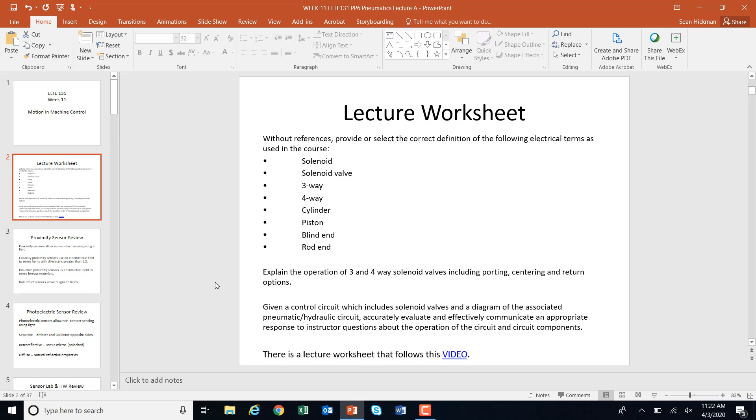Let's start with a proximity sensor review. Proximity sensors allow non-contact sensing using a field. You don't actually have to touch something, you just get within the field. Capacitive proximity sensors use an electrostatic field, and they're affected by dielectric greater than 1.2. We saw that styrofoam didn't do it, but if you had a bottle full of liquid, the liquid would set it off, and it senses just about anything. Inductive proximity sensors use an inductive field to sense ferrous metals. And then Hall effect sensors use magnetic fields.

So that was our proximity sensors. We talked about photosensors, and they used light to allow non-contact sensing. They were separate, with emitter and collector on opposite sides. Talked about a light curtain. Retroreflective uses a mirror, and we demonstrated polarized versus non-polarized. The polarized gives you even a little more specific operation if you need that. And diffuse uses the natural reflective properties of the material.

There's also a variety of other sensors we talked about, for example ultrasonic that might deal with sound. And we took a look at some homework and some labs.

I encourage you to pause the video and check the homework here. You can click this link and see how your homework compared to this. I kind of talk you through some of it. It's going to be just like this on the quiz. And the sensor lab answers can be found here. It takes a little while. I go through the sensor lab, and you can compare your answers to what was here so that you're able to pass the quiz.

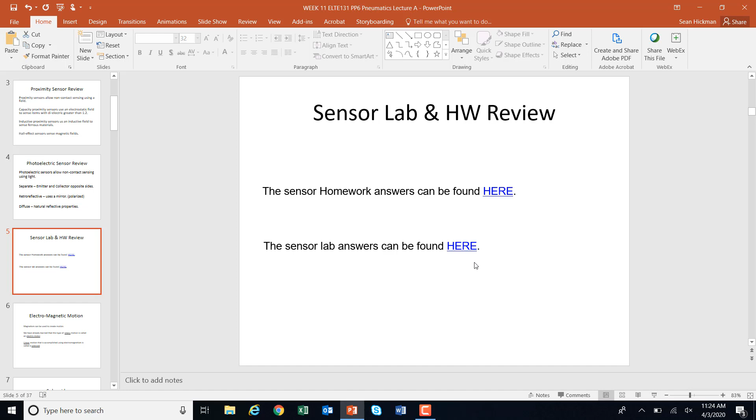So this week we're talking about motion. We're going to start talking about electromagnetic motion. We've learned that magnetism can be used to create mechanical motion. We've learned that rotary motion, when you use magnetism and electricity, is called an electric motor. We're not going to get into electric motors right now. We're talking about creating linear motion using electricity and magnetism. We accomplish this using a solenoid. So electric motor for rotary and a solenoid for linear.

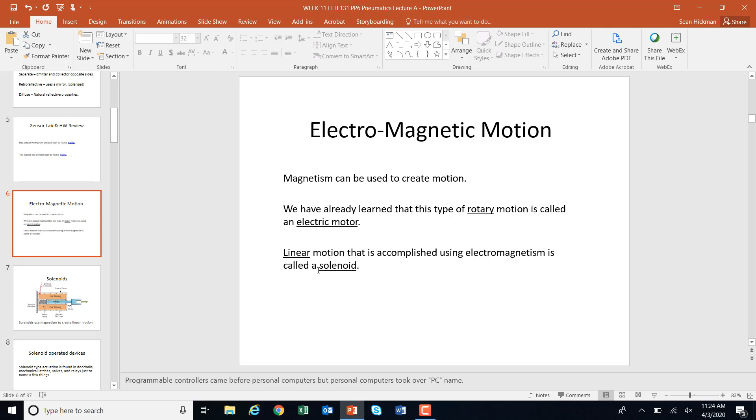What is a solenoid? They use magnetism to create linear motion. Here's a cutaway of one. Hopefully it makes sense to you. This is a coil of wire here, this winding here. It's a cross section. So when you run current through there, you get a magnetic field. And so when that magnetic field comes online, you have an iron or steel plunger here, and it gets pulled in towards the magnetic field. And then when you remove the current, the magnetic field goes away, and a spring pushes it back out. So this is linear motion, in and out, depending on whether there's a magnetic field or not.

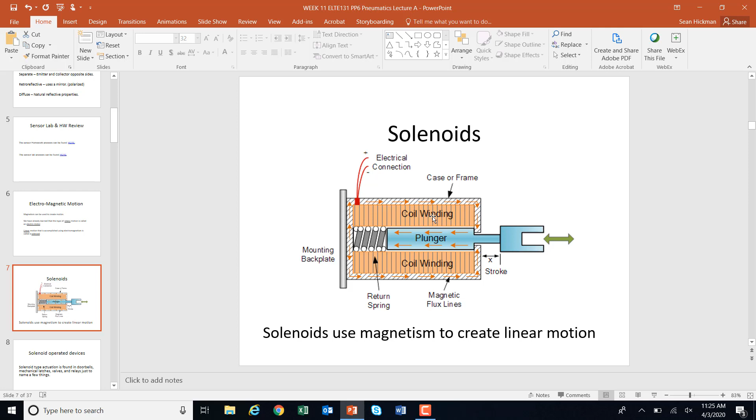Solenoid operated devices. There's quite a few around. Let's go back to your 109 days where you had the buzzer boards, those bells. Your doorbells there were solenoids that were just pulling a ringer in and out and hitting it up against a steel annunciator. There's mechanical latches that you could use a solenoid to pull in, maybe like in your car doors. Valves use solenoids. That's what we're going to be studying today. Relays use this solenoid actuated device. You run it through a coil, and it pulls the relay in, and the plunger comes in, and the contacts are make or break. So there's some solenoid devices that you might be familiar with.

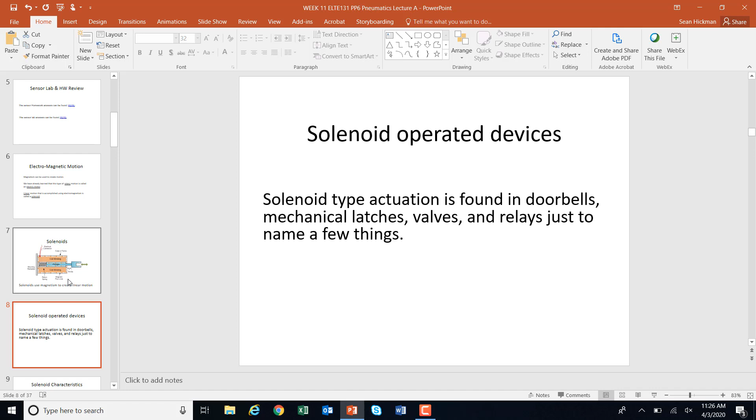Just want to remind you of the solenoid characteristics because it's a coil. When you first energize it, you're going to get a very high inrush current here. And then as the solenoid starts to move, and it moves to the position where it's supposed to be, this inrush current settles down a little bit, and then you have your steady state current. You must protect the circuit at a level that's above the steady state current. So let's say the steady state current is 12 amps. Maybe a 15 amp circuit breaker would work, okay?

But you wonder, well, this exceeded that 15 amps in this shaded area. Yes, you can do that for a very short time, and that is your time delay. So your delay has to be long enough so that you get underneath the circuit protection and then steady state, so the circuit protection doesn't trip.

So what affects this operation of a solenoid? Well, the pull - what is the solenoid pulling against? Let's say you have a solenoid that's pulling the locks on your door. Whatever that takes, is it a pound, 2 pounds, a half a pound? That amount of pull that it's pulling could cause this to spike up higher or lower, right? The stroke length - how long of a pull is that solenoid?

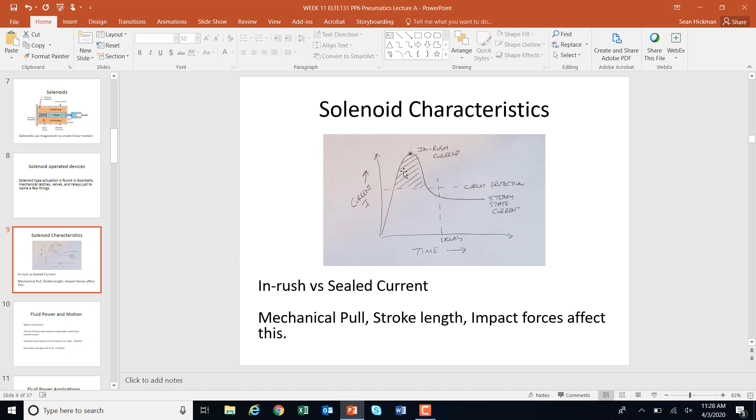The longer it is, the more this current spikes up, and the longer it takes to settle down. A very short pull, and it just might pop up and then settle in real quick. Impact forces—it's kind of a violent situation when you activate a solenoid. It slams, and does the solenoid bounce back and forth a little bit, or does it just activate? Those are some of the things that affect how much initial current it draws when you energize it.

Let's move on to fluid power and motion. What is fluid power? It's the use of fluids under pressure to control and transmit power. Hydraulics uses a liquid such as mineral oil, and pneumatics uses gas or air.

Let's take a look at hydraulic fluid power. You see this on big machinery like bulldozers and backhoes, with huge hydraulic cylinders. That hydraulics operates at a pressure of a couple thousand pounds per square inch, or PSI. The benefit is you get a lot of force out of those cylinders—a lot more. They're very high pressure, a lot of force. That's the benefit.

But the drawback is you could end up with a very loud system. That system leaks a lot, and it can catch on fire because hydraulic fluid burns.

Whereas pneumatic uses air, and we'll be using compressed air to move a cylinder, and you see a lot of this in automation. The benefits are that it's clean. If air leaks, big deal, right? Compared to hydraulic fluid, it's not combustible, and it's readily available. Most shops have an air compressor system that you can access.

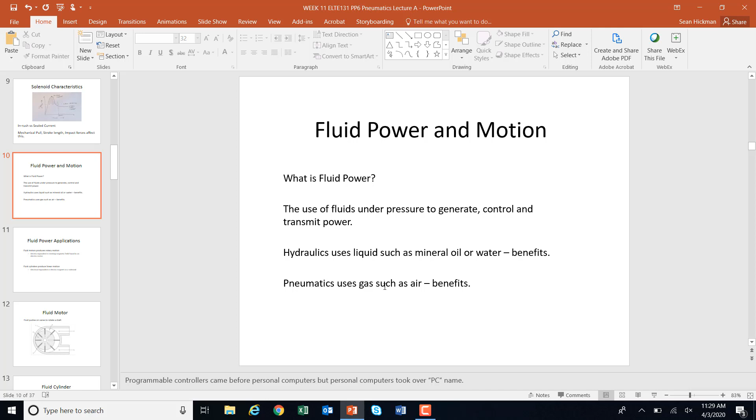The drawback is it's not nearly as powerful as hydraulics. So if you need a lot of force, you end up with pneumatic components that are quite a bit larger than the hydraulic components.

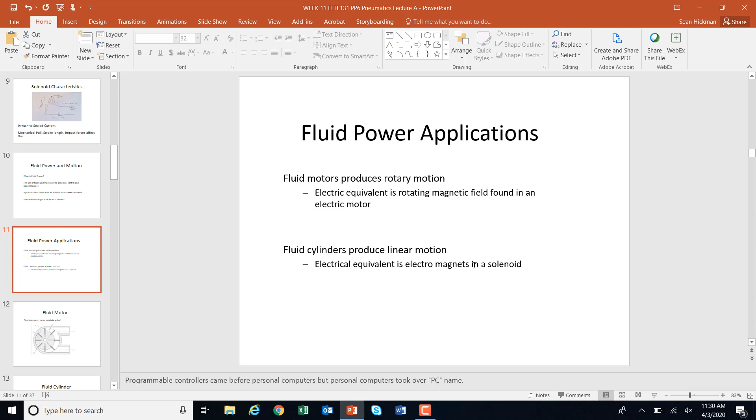So, fluid power applications. We can use motors to produce rotary motion, similar to how we use electricity to create rotary motion with an electric motor—we can have a fluid motor. And fluid cylinders can produce linear motion, similar to using a solenoid with electricity. So we can get rotary and linear motion using fluid power as well.

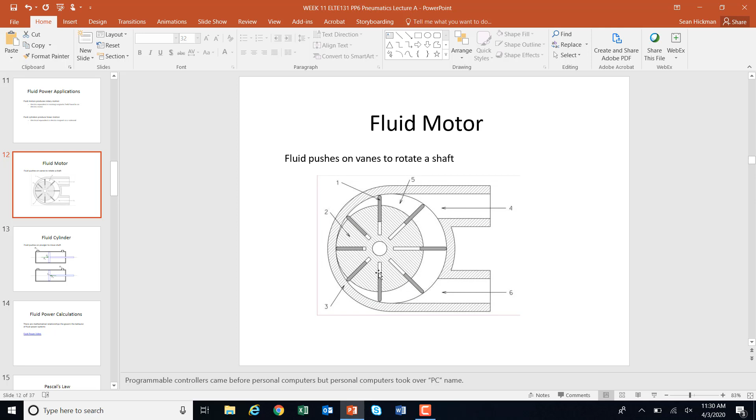What's that look like? Here's a fluid motor—this is a vane type compressor. The air comes in, it pushes on the vane, so in these pockets there's pressure, and it gets sent around and then exhausted on this side. This will spin, creating rotary motion, called an air motor or a fluid motor or hydraulic motor.

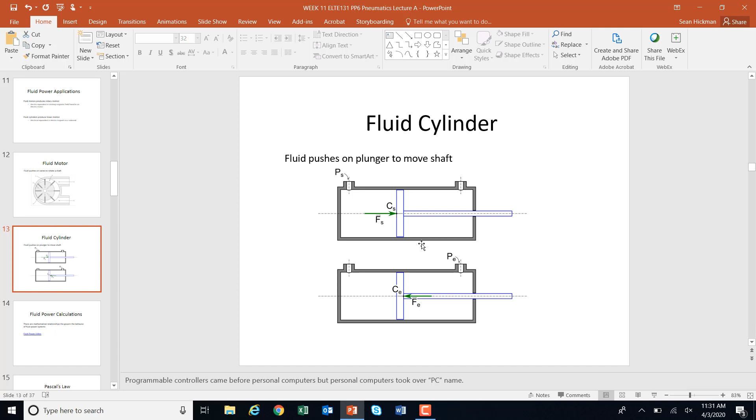What we're really studying this week is cylinders. The way a cylinder works is you have a piston inside. When you put pressure on this side, you get higher pressure on one side of the piston, and the piston moves out. When you want to retract it, you run pressure into the other side, and the piston moves this way. That's a quick summary, and hopefully you understood from the reading that we're using cylinders with pressure on either side.

There's a lot of mathematical relationships that govern the behavior of fluid power systems, and there'll be a little bit of this on the quiz. So go ahead and stop right now and watch this short video on fluid power.

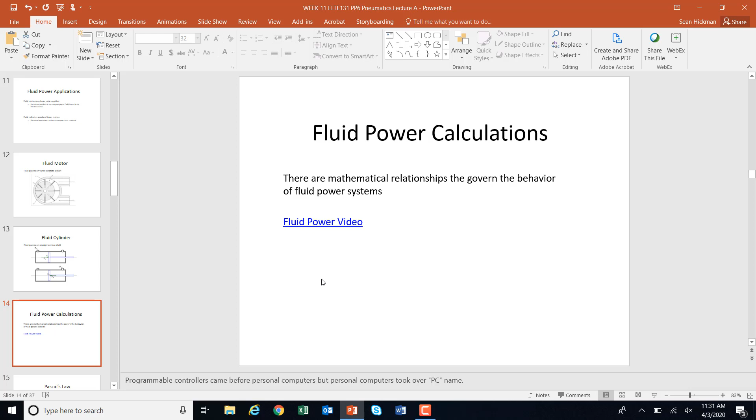So this is the pressurized fluid here, and if you pressurize something too much, it just explodes, and it explodes outward, perpendicular in every direction. So that was Pascal's law that you learned about.

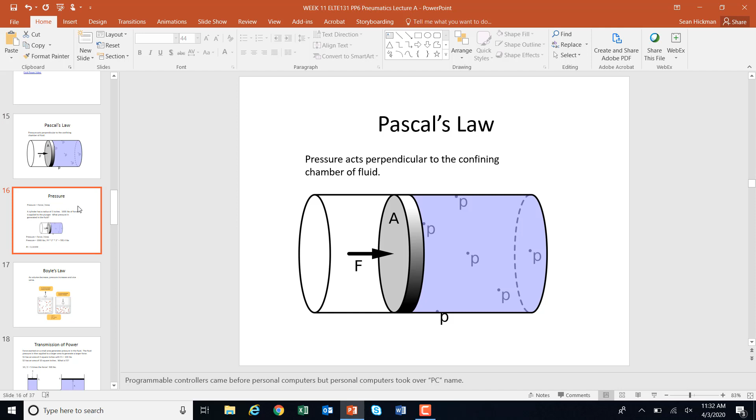The video showed that pressure is force over area. My force is 1,000 pounds, that's what I'm pushing down with right here. And area is pi r squared, so pi times radius squared, where pi is 3.14. So 1,000 divided by pi radius squared would be 785 pounds per square inch.

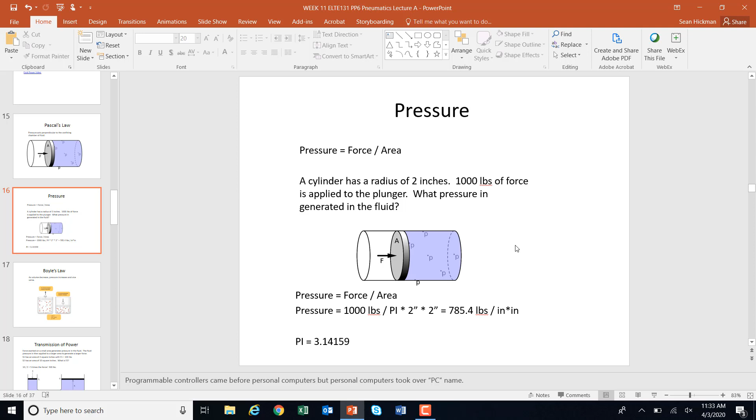So this would be pounds per... let's see if it lets me do that. That would be pounds per inch times inch, there we go. Pounds per square inch, sorry about that. So 785 psi, okay.

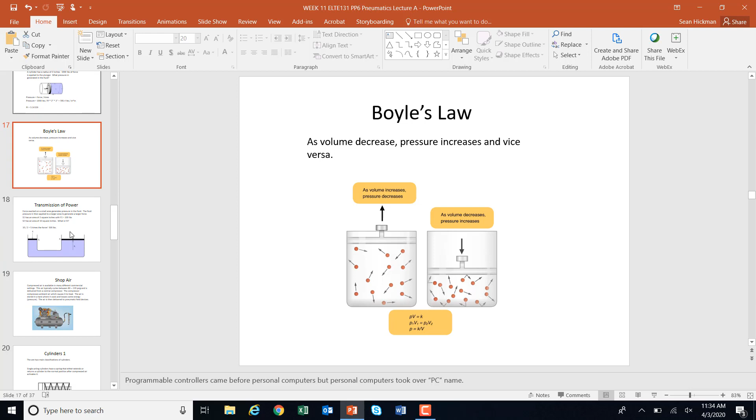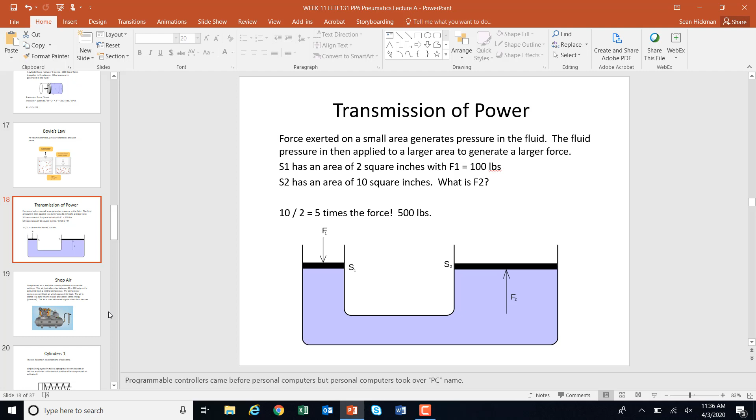In a shop or facility, you're going to have compressed air, and it usually cycles between maybe 80 and 120 psi, or 90 and 120 psi, depending on how you set your pressure switch. You're going to have a central compressor, and what this does is take ambient air and compress it.

When you compress air, it gets hot. If you were to touch the top of these cylinders up here that are compressing it, they'd be hot, not because there's any electricity going through them, but because they're compressing air. So this air gets compressed and put into a big tank.

And it's under pressure, so it wants to explode, but the tank contains it. Then the air cools and loses a little bit of its energy, a little bit of pressure. But after a while, this will stop at whatever pressure, say 120 psi, and we'll have a tank of air. Then this compressed air is piped all over the facility and delivered to your field devices, which is what we'll be talking about today. So that's the way this works.

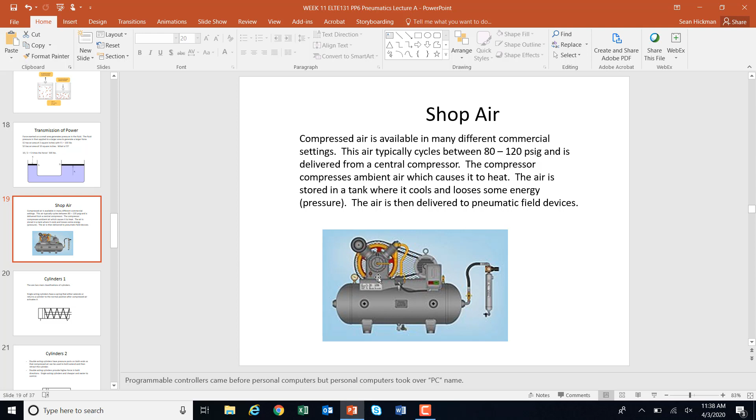In your PowerPoint handout, there's a big explanation of the components of shop air, and you'll want to understand how they work. So here's the really important stuff for our lab.

There are two main classifications of cylinders. There are single acting cylinders that have a spring that extends or retracts them, and compressed air works opposite of that. Let's take a look at this.

This is my piston here. If I push pressurized air into this space, this rod will move out and you'll get linear motion. When I remove the air, this indicates that there's a spring here, and the spring will retract it. So in this case, pressure extends the cylinder because it goes into this cavity and pushes on the piston, the rod goes out, and a spring returns it.

I'm going to show you some examples later of spring return cylinders versus double acting cylinders. Double acting cylinders have ports on both ends. So if I put some pressure on this end and push on the piston, this rod will extend, and it might extend out to right here. The piston will be here. Then I can put pressure on this side, and that would cause it to retract. So pressure to extend, pressure to retract.

What's different about these is, if I go back to here, this pressure on this side is what causes that to extend. So if I want more force coming out, put more pressure here. This spring right here, I can't adjust that, so the retraction force is whatever that spring is. If it binds up because the spring's not strong enough, there's not much you can do about it except replace it.

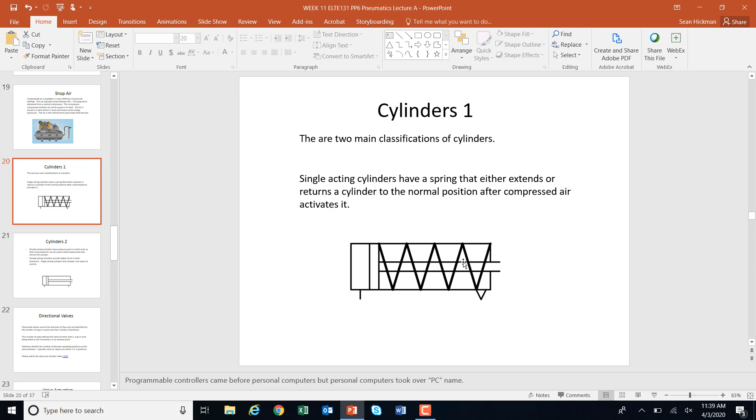Whereas here, pressure pushes it out and pressure returns it. If you want more force, either extending or retracting, you can just up the pressure on either side of these and it will generate more force.

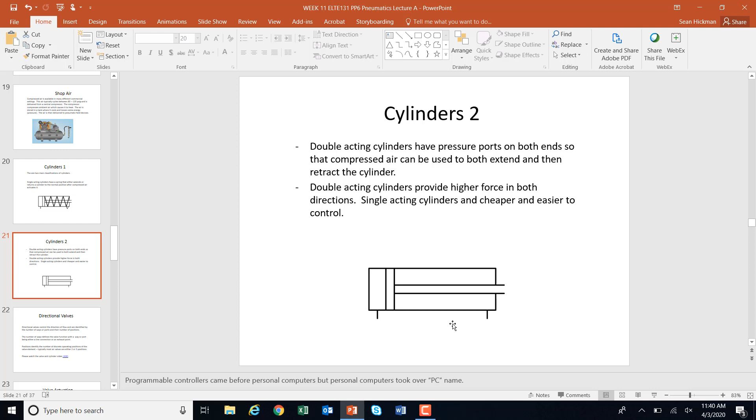Directional valves. The number of ways on directional valves controls the flow, and there's a lot of ways and ports, and there's ways that the air is exhausted. We're going to break this all the way down, these directional valves.

But before we get into it, I've got a little video here about the trainer that we're going to be using. I want you to take a look at this, stop it, and then as we go through this it will make a little bit more sense to you what we're talking about.

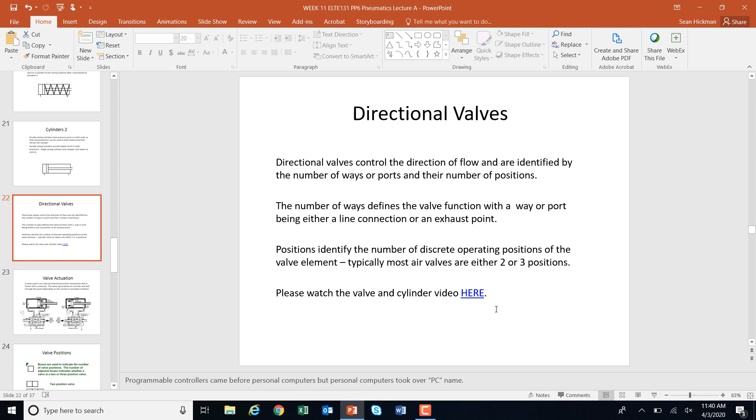So a couple of things about this. These are in your lab packet. You will really want to take a look at them.

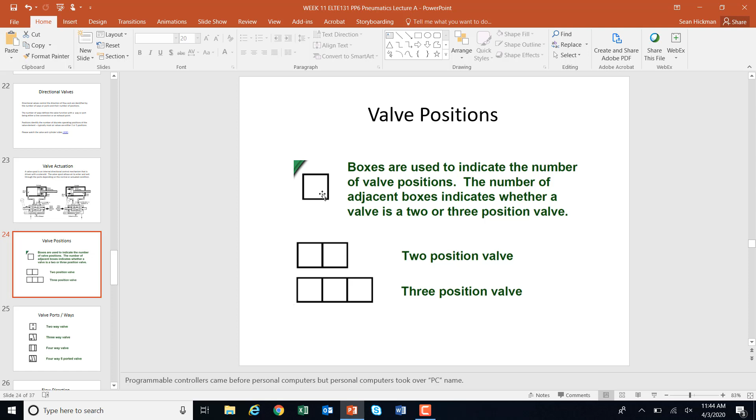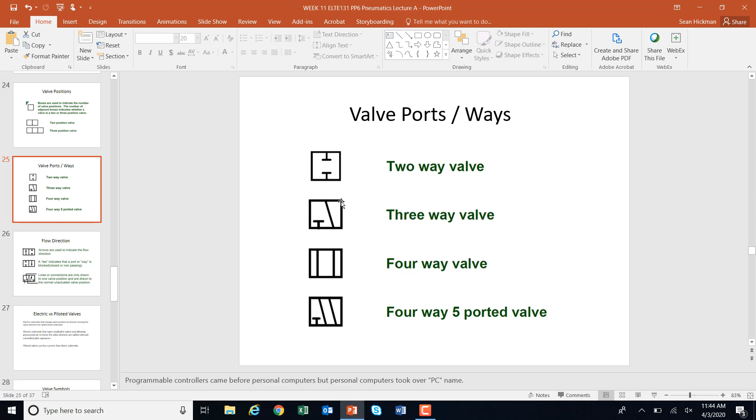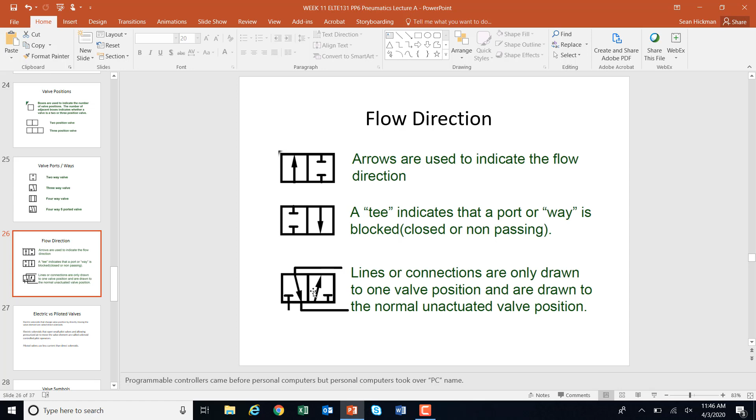Looks like this is the same right here. This is another two positions. The first position, it looks like air comes and it goes to the right port, and in the second position, air goes from the left port out. So we'll be taking a look at some more of these right here to understand how to read these.

Couple notes. Electric solenoids change the valve position by directly moving the valve element, and they're just called direct solenoids. So if you went back to here and we put a solenoid on here, it'd be a direct solenoid moving that back and forth.

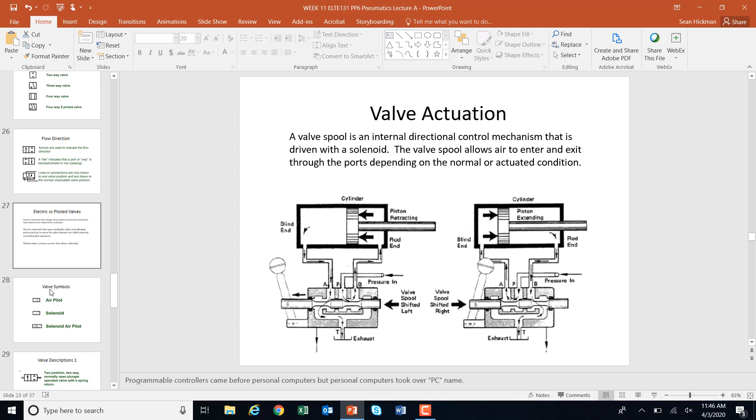Versus electric solenoids that open small pilot valves and allow pressurized air to move - these are piloted valves. The air does the work. Doesn't require very much electricity at all. So piloted valves use less current than direct solenoids. It's kind of a combination of the air pressure and the electricity. Piloted valves are what you're going to see out in the field, okay?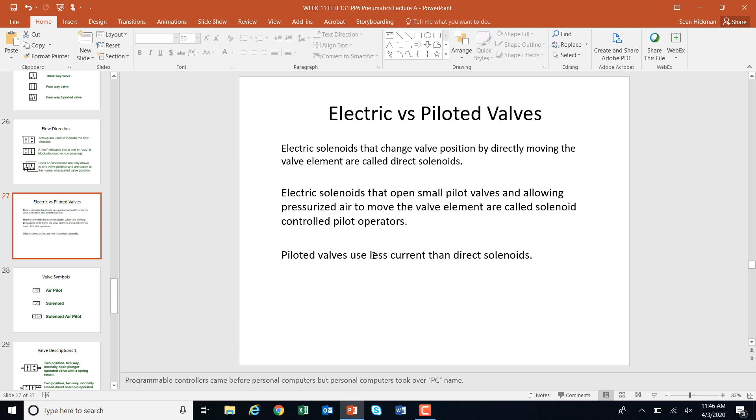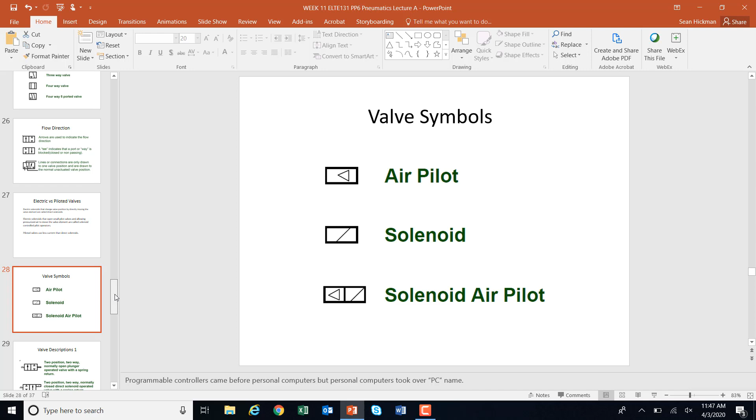Valve symbols. Here's my air piloted. Here's my solenoid, direct solenoid. And here's my solenoid air piloted. These are kind of what we'll be using right here because we do have electricity causing the valve spool to move, but it's helped along a little bit with a piloted valve, okay?

So let's take a look at some valves and let's classify them. Let's take a look at this first one. I say it's two position because it's got two boxes on it. So two position, 1, 2. It says two ways. Okay, but look, you say, wait, 1, 2, 3, 4. That's 4 ways, isn't it?

No, it's not. You only look at one of the positions here, and you'll see that there's 1, 2. If you look at the second position, 1, 2. So there's 2 ports on this. And it's got a plunger here - looks like there's something on the end that if you push it, it causes it to go back and forth, and a spring returns it back to the other position. So it's either closed or open. If I push this item right here, it changes position, and when I let go, the spring goes back.

Let's take another one here. 2 position, 1 square, 2 squares. How many ways? 1, 2. And this is a direct solenoid, and it has a spring return. So the solenoid causes it to move. When you break electricity to the solenoid, the spring returns it.

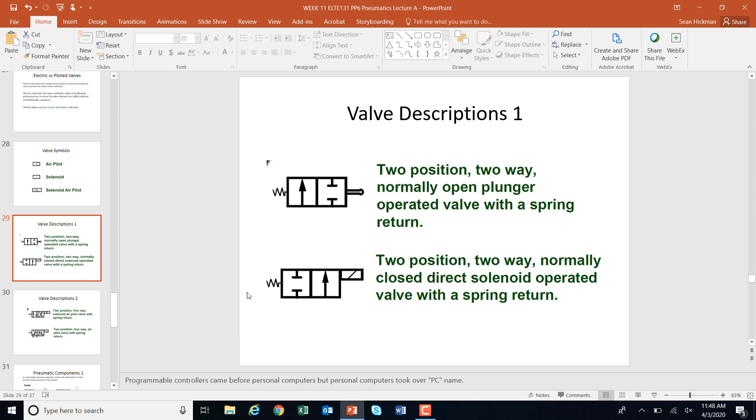Let's do some more. 2 positions, because I got 1, 2 boxes. 4-way, how come? 1, 2, 3, 4 connections to each box. This box also has 4 - 1, 2, 3, 4. And it's air piloted valve with a spring return. That's what this is showing here.

One more, 2 position, 1 square, 2 square. 4-way - oh, this should be a 5-way, it looks like. I'm going to change this to a 5-way. 1, 2, 3, 4, 5. This is a 5-port valve, not a 4-port. 1, 2, 3, 4, 5. So this should be 2 position, 5-way. And this is air piloted with spring return, okay? So that's where we're at on that one.

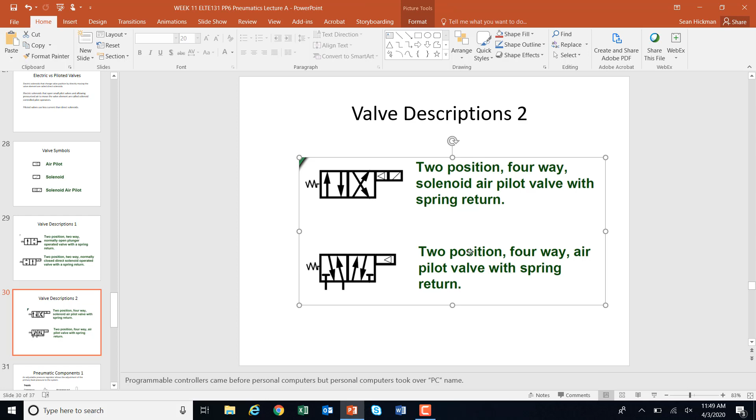A couple of other pneumatic components. You need a compressor. Air receivers and T junctions. Kind of looks like when you build these up, it's similar to building up a control diagram. You would look for service equipment - filters, lubricators, separators - and this is the symbol for a regulator.

And I want to remind you, and I'll say this a couple times: when in doubt, meter out. I showed you that in that prior video. You're going to want to remember that.

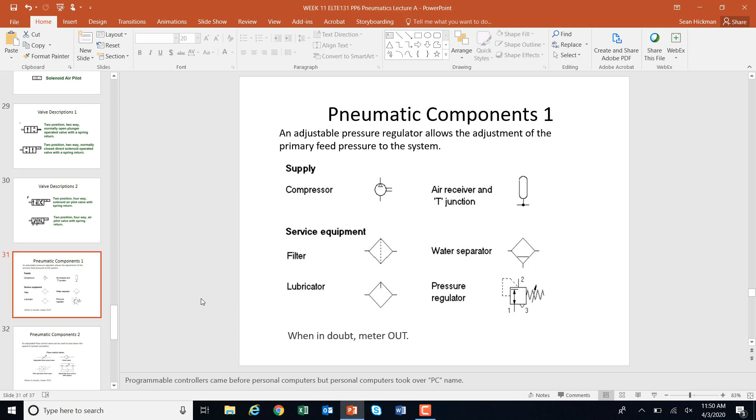A couple more. Here is an adjustable flow control right here. That means it limits how fast the air goes out. Check valve - this means that air can only flow one way, because when it tries to flow the other way, this ball gets seated in here and it can't flow. So it only allows air one way.

Pilot operated check valve. The air affects the way that this is checked here. An adjustable flow control with a bypass.

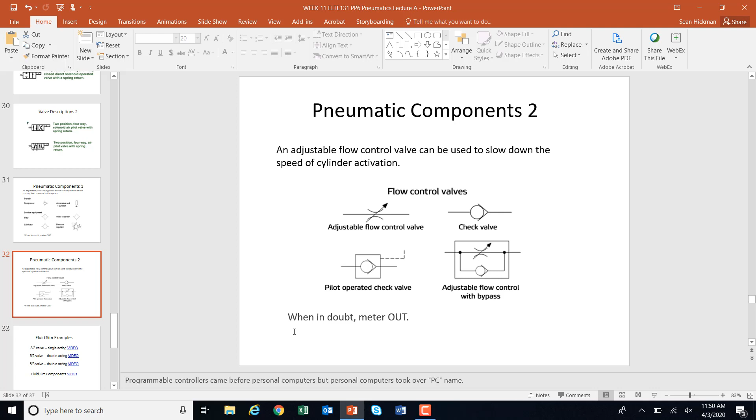Okay, and you'll see these quite a bit. I want to remind you: when in doubt, meter out.

Okay, so here's a big one. Here are the operation of 3, 2, 5, 2, 5, 3 in fluid sim components. You're going to want to stop this - each one is about 2 minutes - and watch how the valves actuate and the change in flow through the valve spool works to cause the cylinder to extend or retract. Definitely want to stop and watch these videos so you understand what's going on.

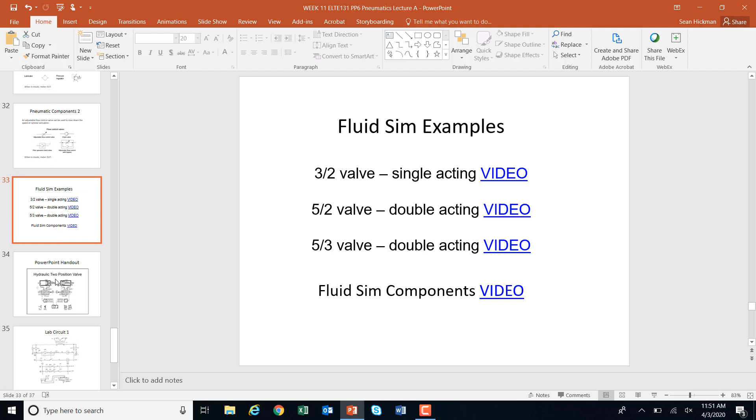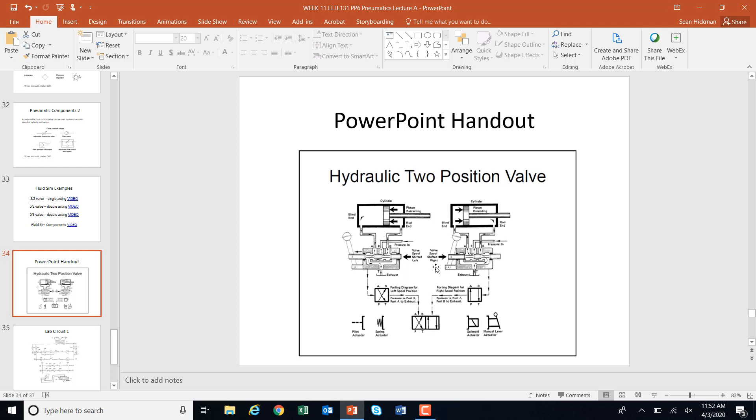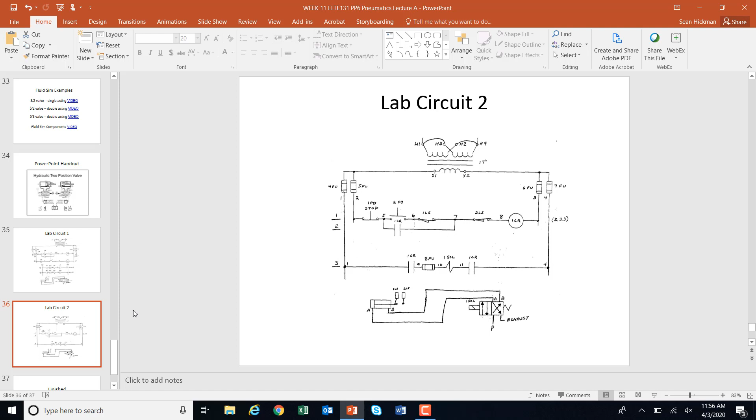At this point, you're finished with lecture - turn in the lecture worksheet. I encourage you to stop and watch a couple of those videos again to be sure you understand what was happening.